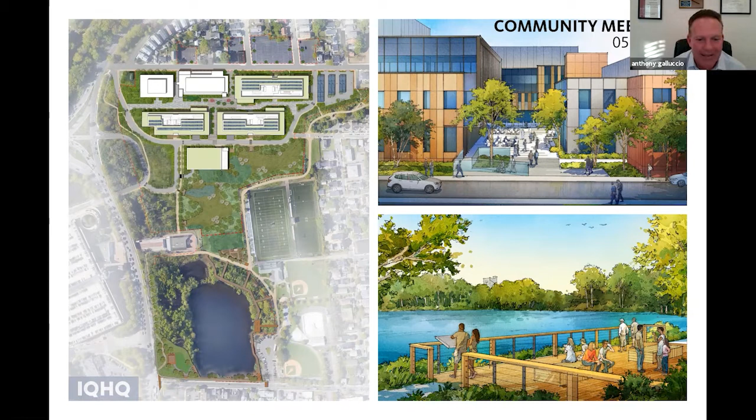Just as a note, we have to give all the credit to the neighborhood—just meeting after meeting and email, sending lists of issues. I have to thank Joel and Lisa and Ronnie and Mike and David and all the Alewife Study Group folks. I want to thank Friends of Jerry's Pond for inspiring our Jerry's Pond plan. We've been out there talking to folks one-on-one, getting opinions through interns and interacting with folks all over the neighborhood, and this is a result of all that input. I do want to thank Mayor Siddiqui and City Councilor Nolan, who are both on and both were adamant about getting more enjoyment and seating spaces around Jerry's Pond. So I want to note their pressure and their insight, and it made a big difference.

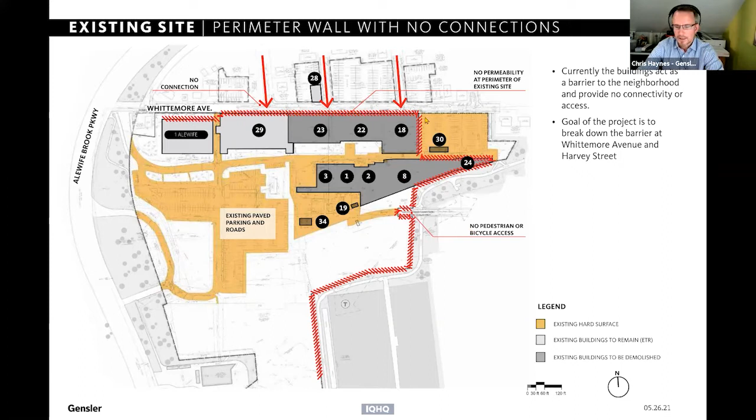I'll walk through them. We have the Whittemore Gateway, which connects to the Central Plaza and through the site down to the head house. We'll talk a little bit more about that. We've got some great imagery to share around a lot of activity and activation of the Central Plaza.

On the east side, a Whittemore linear path connection that we heard from you, Lisa, and from others representing the northern Whittemore neighborhood, that was a really important connection that was needed. So we're working on implementing and integrating that into our design so there is a clear path and connection from Whittemore to the linear path. That also connects into the east-west axis of the project we call the Promenade.

At Harvey Street, currently there's a fence and no access. There will be bike and pedestrian connection. There is no vehicular access, there will be emergency access, but no vehicular access. So no cars cutting through the site or coming on Harvey, only bike and pedestrian at that connection point. That's where we have a blue bike station that we've proposed, which we heard through the community groups was an important amenity to include on the site adjacent to the linear path.

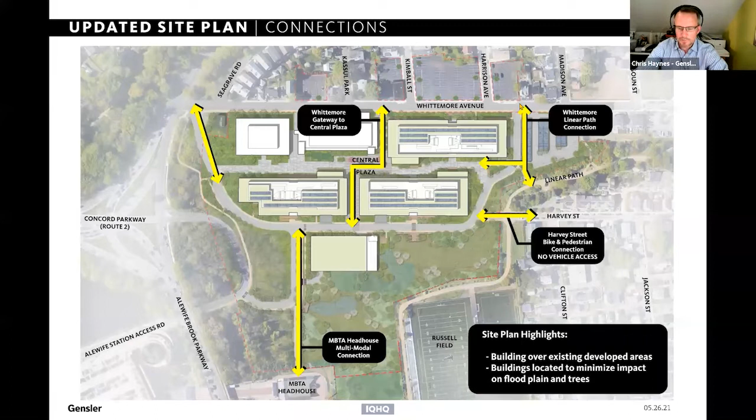So those gateways really turn into this network of paths, and I think we worked on these paths week in and week out together with the Alewife Study Group and others to really land on what you see today. So it has been quite an iterative process, and that's been great.

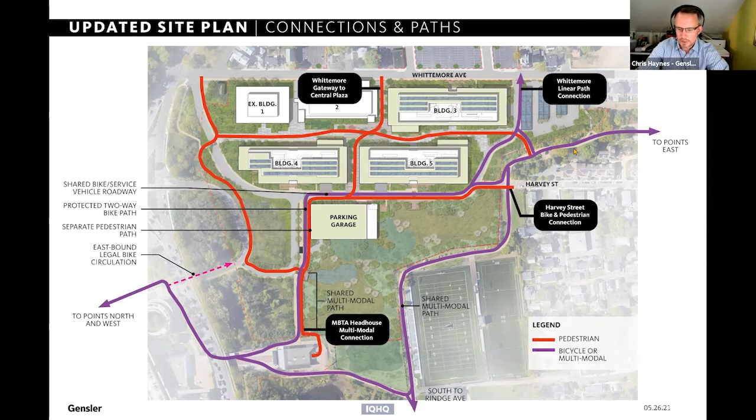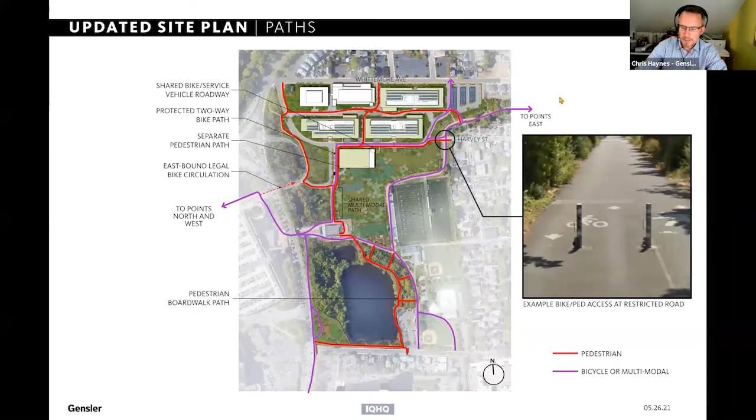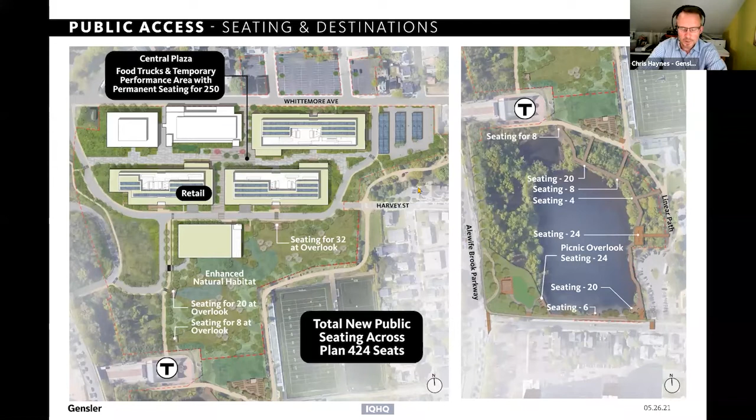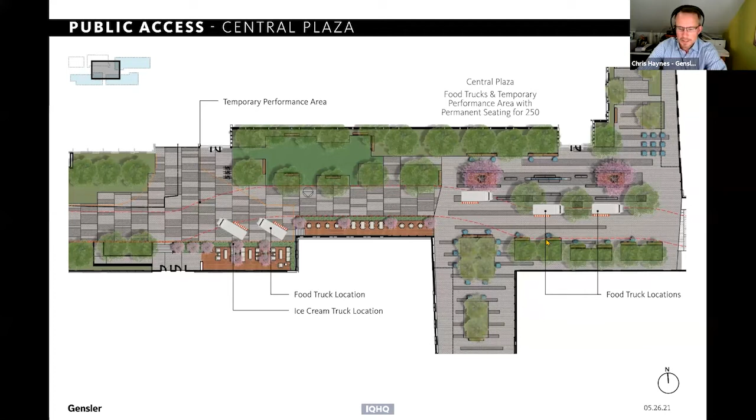There'll be more detail about a lot of the Jerry's Pond areas, but I do want to show some specific imagery around the center plaza and zoom in a little bit on that area, because it does offer a variety of seating. There's a fountain in the center that in the summer and non-winter months will be a great attraction. We're showing food trucks here, an ice cream truck, really a vibrant activity within the Central Plaza, with seating for over 250 throughout various seating arrangements, movable and fixed. And then I'll go through a few views.

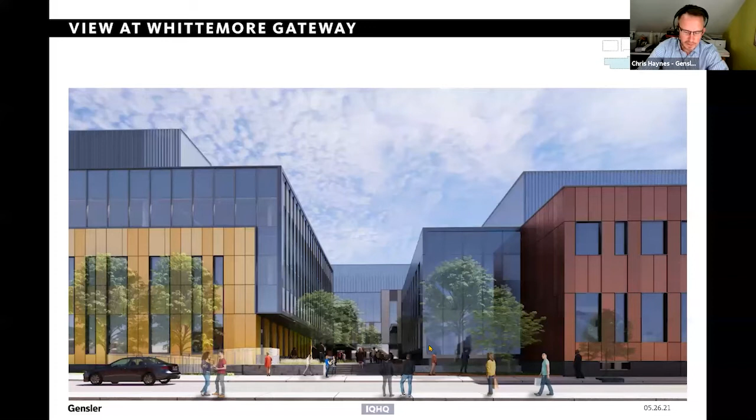As we go into the Central Plaza now, you're seeing the food truck activity within this Center Plaza, variety of seating, both fixed and movable, to create a really nice dynamic atmosphere. We also heard, more trees within the Center Plaza, so we added probably another half a dozen or more trees within the Center Plaza, more shade, less heat island impact. So a lot of great improvements there.

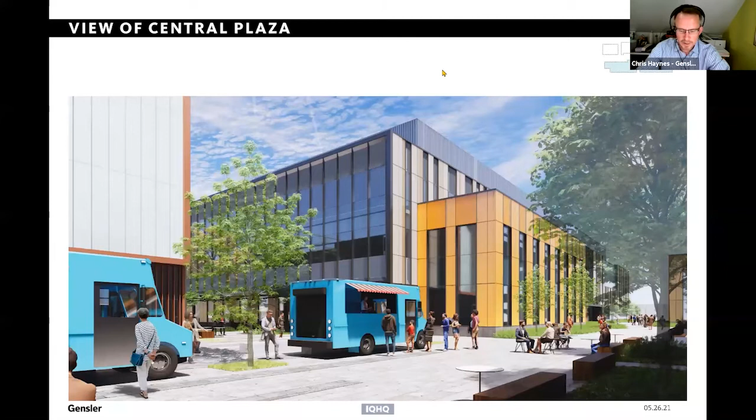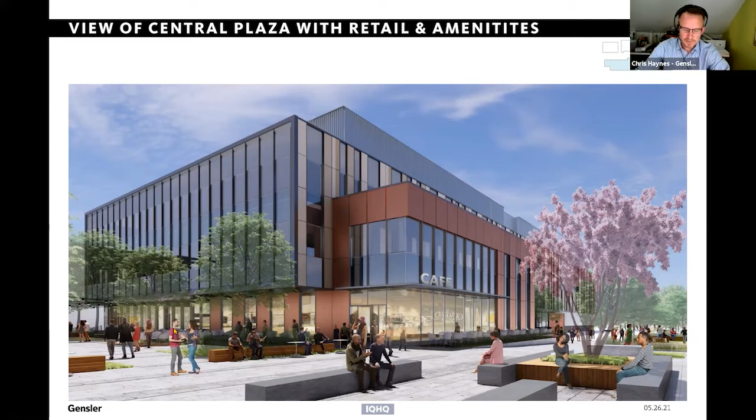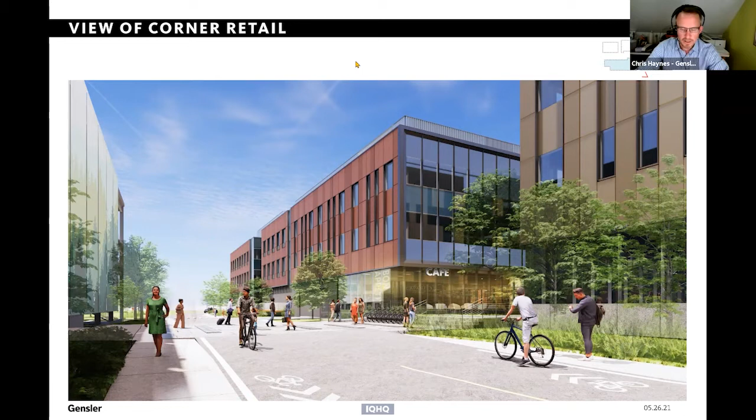Turning around, looking back toward the retail area, you can see nice visibility into the retail and amenity space. We're showing lights strung between the buildings, so a nice festive atmosphere within the Center Plaza area. Now we're down working our way along what we call the service road, where we have the bike shared path that you can see in both directions, as well as visibility to that retail spot. So if you're walking from Harvey Street on the way to the T, you could stop by, grab a coffee or a breakfast, and head down to the T in the morning. A lot of great opportunities and exciting destinations, and it's great to be able to share a lot of these images that we have developed over the spring through great collaboration with this group.

And then I'll end my section here just talking about the MBTA head house. We know it's in tough shape. The plaza is in tough shape. The paving, IQHQ is in talks and in coordination with the MBTA to make a series of improvements to the head house.

We're widening the path to the north, and they're looking at a mural program for the north facade. There's quite a mural history in Cambridge, with some really great murals in Central Square and other areas, so that could be a really exciting opportunity for engaging local artists. We'll also be painting the rest of the head house, freshening it up, replacing the entry doors, replacing the paving, and adding new plantings. You can see here some planters with trees to add shade and seating, making it a more livable plaza, a place to wait for a friend before heading out on the Red Line. We'll also add additional exterior lighting for a more secure area in the evenings.

So that's exciting. It's a big destination and a big part of the transit-oriented development, and I think the improvements will be great for the community and for the project.

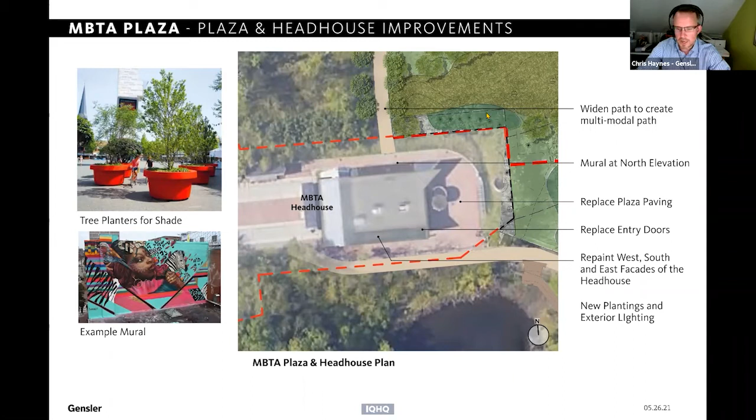Next, I'll hand it over to Chrissy Gabriel from IQHQ to introduce traffic.

Thank you, Chris. Chrissy Gabriel, Director of Development with IQHQ. I wanted to quickly touch base on parking for the site. We are confident with the amount of parking proposed for this project. Throughout the community process, we've learned that people in the neighborhood really want to make sure we have enough parking to support the site, having enough supply but also not too much in order to limit traffic impact on the neighborhood. Our proposal includes a slight reduction in parking across the site from existing conditions, and we really believe we've found the correct balance here.

The use of the lots north of Whittemore will also help contribute to that balance. We also wanted to note that we'll be allowing the community to use these lots as a resource in certain conditions, like snow emergencies and whatnot, when IQHQ is not using the lots.

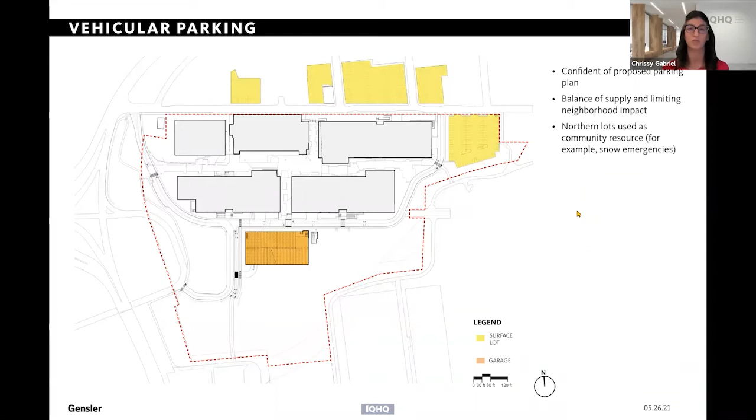I'll hand it over to Sean Manning to provide some updates on other neighborhood feedback we got regarding parking and traffic. Thank you very much.

Good evening, everyone. We're really happy that you're able to attend today. I've got some traffic updates that I want to share with you, many of which are in direct response to community input we've received over the past few months, echoing what Anthony said at the beginning of the presentation.

I want to start with the garage and its positioning relative to some really key access and circulation advantages we're trying to take in connection with the site, most notably the strong connections the site has to and from Route 2 using the Alewife Station access road. I've got some follow-on graphics to show that a lot of the traffic wants to come from and go to that route. By virtue of that connection, we can move traffic to Route 2 without ever going on local streets or the Alewife Brook Parkway, and that's certainly a differentiator of this site compared to anything else in Alewife.

For those that do want to go on the Alewife Brook Parkway, we're designing this to really minimize access and circulation through the neighborhood, making use of our westerly driveway connection to Whittemore. In the afternoon that's supported by a police detail, which also doubles as a way to better enforce the turn restriction on Whittemore, where you're not allowed to go eastbound through the neighborhood between 3 and 7, Monday to Saturday.

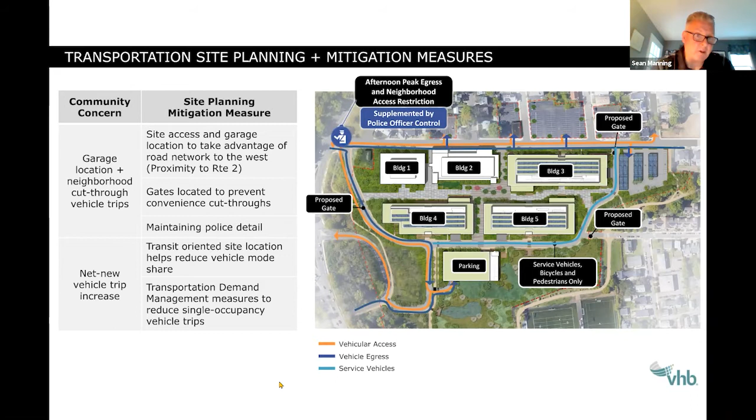I want to speak to the notion of Route 2, which journey to work data for the Alewife district suggests up to 50% of our traffic is going to come in that direction. Certainly, we have traffic that we need to manage on Alewife Brook Parkway. We know that, and we are identifying a modest amount of downtown traffic that may come up Massachusetts Avenue and could use Magoun Street to get in. Although we are talking with ASG about how we can better encourage those folks to go to Mass Ave and take a left on Alewife Brook Parkway.

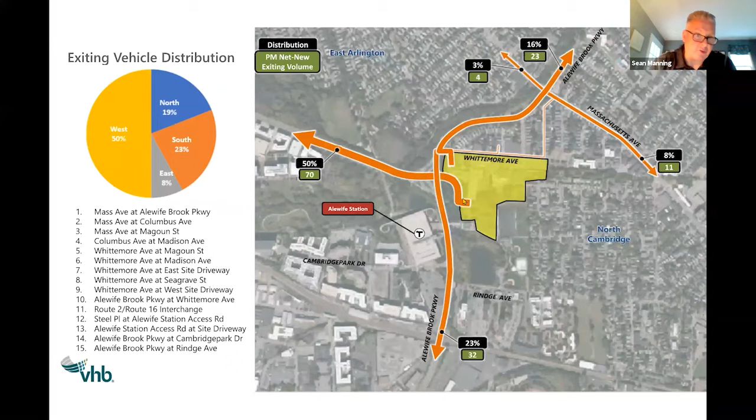If we can click again to the next slide. This is exiting traffic. It's essentially showing the same thing, but again, our goal is to really leverage the value of direct connection to Route 2 and minimize traffic on other streets.

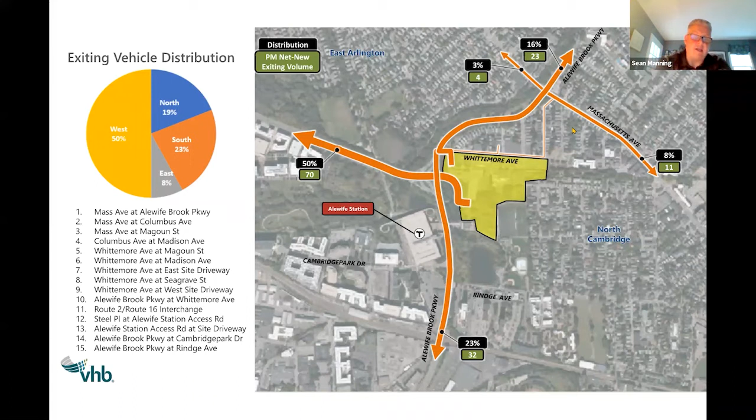So that's all I have for now. Thank you very much. I'm assuming you'll have questions and comments, and we're happy to engage you in that. And I'm turning the presentation over to Eric Ruoff, who is going to walk through some project sustainability updates for you. Thank you. Thanks, Sean.

Hi folks, my name is Eric Ruoff. I'm with the Green Engineer, and we're the Sustainable Design Consultants for the project. This team really identified sustainability as a foundational goal for the project right from the get-go, and we certainly heard similar priorities from the community. So we're excited to have this opportunity to provide an update on some of the initiatives underway, and hope you'll be pleased to see what we're presenting here, because there's a lot of exciting stuff to highlight.

So let's dive in. We've got a slide of general elements to touch on. This site includes a significant amount of open space, as Chris already mentioned, and we'll get into more detail as we go on. Much of this is going to be sensitively restored to more natural conditions. So that's great. And there was a mention of more trees - we got more trees along Whittemore Ave as well. The site lighting along any perimeter spaces will be sensitively and respectfully designed for light pollution impacts.

We're also primarily focused on rainwater and management of storm events, and that's going to include the harvesting of rainwater that'll be reused for site irrigation. We'll touch upon some other ways of reducing peak runoff later on. The design itself will be elevated - the ground floor and the utilities - to be above the 2070 projected floodplain height, and that's going to protect building infrastructure and keep it operational during future flood events.

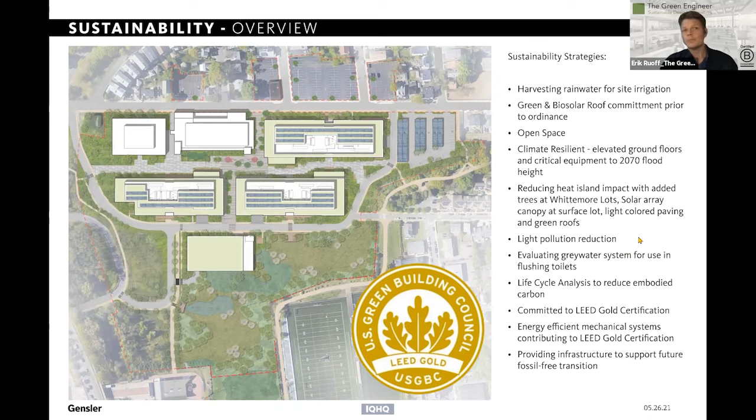So I want to dive into a few particular elements we want to highlight today. First, the project team committed to green roofs early in the design, even before the newly approved green roof ordinance took effect. Right now, the approach is to satisfy this using multiple green roof solutions. First, there will be some traditional green roofs throughout the lower roof areas of all the new buildings.

Then what we're also going to see is biosolar, which is a combination of green roofs and PV panels together. This is new to the US marketplace, an approach that really does double duty - it provides all the benefits of the green roof while producing renewable energy on site. The combination of those two has an added knock-on effect of increasing the performance of those PV panels due to lower ambient air conditions. It really shows a demonstration of this project team to be a market leader.

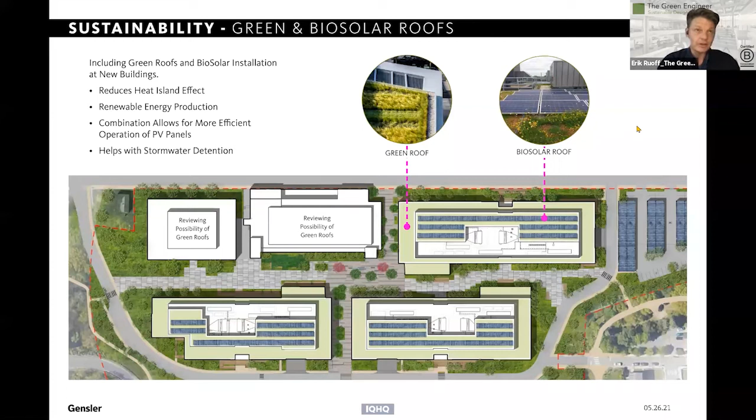So outside of just these buildings, the garage itself will include a large green roof canopy area. This is a large uninterrupted green roof that will provide, along with all the other green roof areas, significant areas of natural habitat, especially for pollinators. It will help reduce peak stormwater runoff. It will help reduce the urban heat island effect and increase the efficiency of the mechanical equipment as well by reducing that ambient air for those pieces of equipment.

So the garage is also going to include some other benefits as well. There'll be EV charging stations in there, and there's going to be a bike repair station, and we're looking at a bike donation site as well, since its connection to that bike pathway.

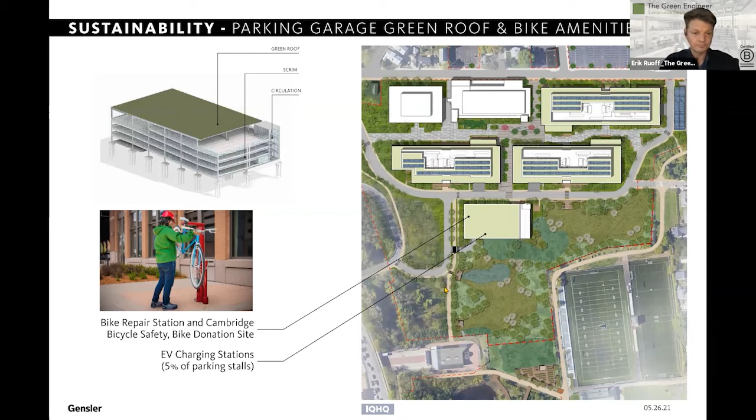So we also have some traditional solar on the site. This is looked at on the southeast Whittemore lot, and this will be through some parking solar canopies. Also in this space will be some additional EV charging stations outside of the structured garage. So we've got a lot going on from a sustainability perspective that's really exciting.

I appreciate the opportunity to highlight some of those elements right now. And we'll pass it off to Howard from VHB, who's going to go into more detail about some of the site design and flood management in particular.

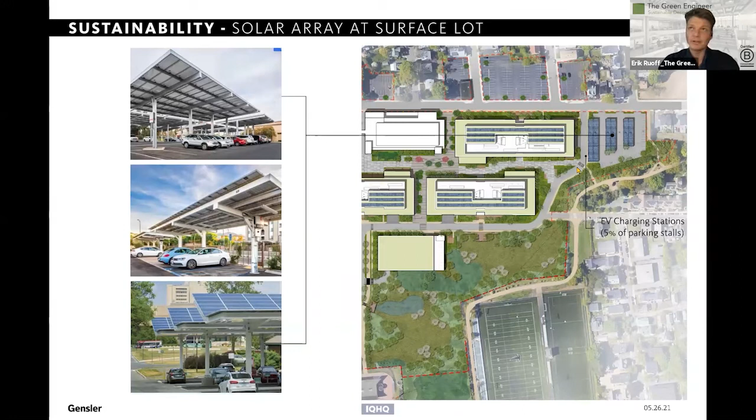Thank you, Eric, and good evening, everyone. My name's Howard Moshier, I'm with VHB, happy to be here again. You've heard a lot about the site planning aspects and many of the sustainable measures. I'm going to talk a little bit about stormwater and flood management.

So one of the questions that's been presented a number of times is how is this project going to benefit the neighborhood in terms of stormwater and floodplain impacts? The quick takeaway is this project will result in improved stormwater runoff, reduced stormwater runoff, improved stormwater quality, which is important to the health of the nearby water bodies, and improved flood storage, all benefiting the community.

There's a number of high-level measures we're seeking to implement. As you've seen on these two comparative slides, we're spending a lot of time trying to devote more space to be permeable and open. That has a number of benefits: it reduces the runoff rates and volumes, it reduces the nutrient load. As composed in the development area, we're about 50% open space.

The green roofs are certainly a big part of that. The open space doesn't even include the green roofs, but the green roofs, as Eric mentioned, reduce the runoff volumes and rates. They also reduce the nutrient loads to the nearby water bodies, and the voluntary inclusion of that large area at the garage is certainly welcomed in terms of stormwater management.

In addition to those low impact development systems, we will be using detention systems below grade that will further take the peak off the stormwater volumes in those storms. It'll hold back the rainwater, and that allows more water from the nearby neighborhoods to take advantage of the below-grade pipe capacity and nearby stormwater networks.

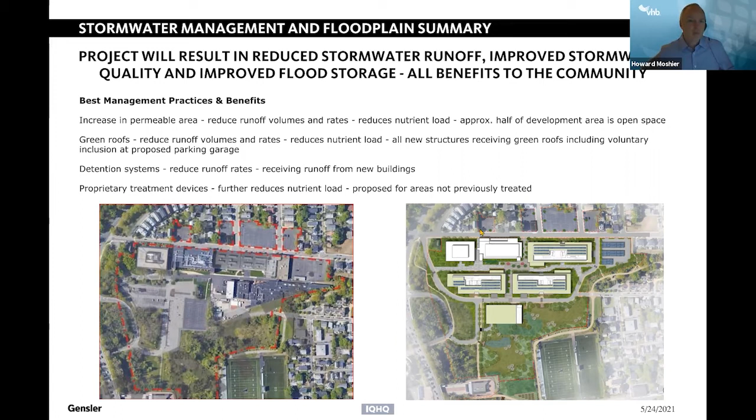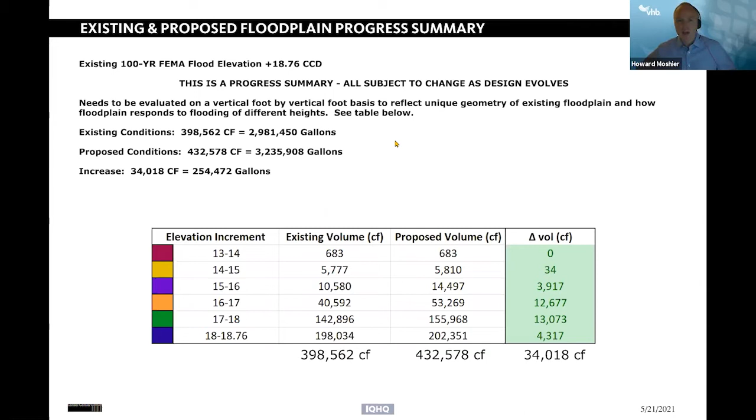So this is just a quick slide, and we're going to move through it, but not all floodplains are equal, and the project's required to analyze it on a vertical foot by vertical foot basis because floodplains have a unique response to different flooding events. On the next slide, you'll see a couple of color-coded maps that represent different elevation increments. I'll give the takeaway, but it's a very detailed analysis.

I'm going to turn it over to Chris Wagner, who will speak about habitat.

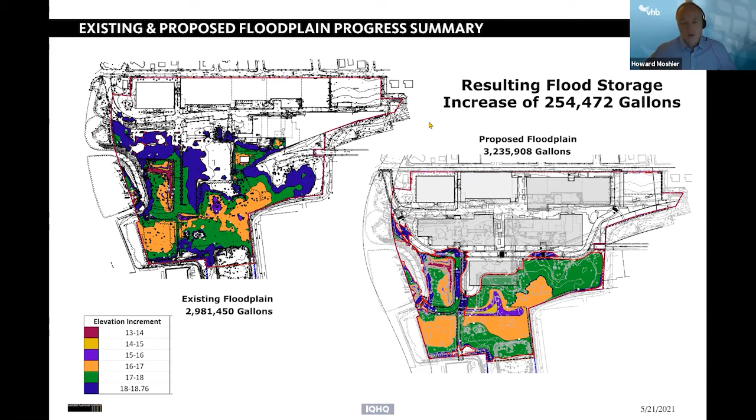Thanks, Howard. Appreciate it. Hi, everyone. I'm Chris Wagner, I'm a senior environmental scientist at VHB, and I was in charge of conducting the wildlife habitat assessment on the site, which we did in response to feedback from the community who asked that a study be done to get a better sense of the extent and nature of the habitat present on the site. So we had two main goals with this assessment.

Number one, we wanted to characterize the various areas on the site and how they're used by the wildlife there. We're not looking to catalog every single plant and animal that might occur on the site, but rather get a sense of the general areas and their usage. Number two, members of the design team were looking to use our results to inform their choices regarding site design.

So that they could make decisions that would balance development with the protection of any sensitive areas on the site. We conducted site visits in March and April of 2021. The visits in March were conducted by members of our staff of ecologists and environmental scientists. I also did a follow-up site visit in April with Matt Schweisberg, who was retained as a peer reviewer by interested members from the neighborhood.

Overall, we can characterize the site as having three main general areas: the northern, central, and southern portions of the site.

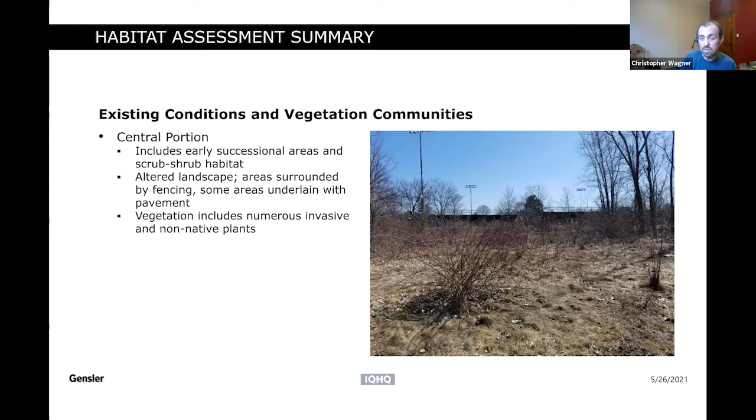Like some of the other areas on the site, there's a notable presence of invasives and non-native plants. There's also a lot of signs of previous site usage, including remnants of the old parking lot in the southwest corner of the site, the old bathhouse foundation, and other utility structures that we found on the site.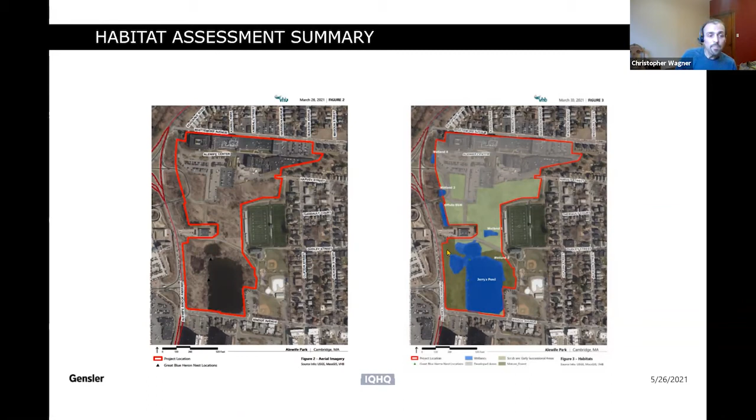So what did we find? Overall, the wildlife generally consists of typical urban residents, although there are some others as well, the most notable being the herons that use the west and northwest edges of the pond. A lot of waterfowl use the pond, and we observed a number of bird species using the pond and also the surrounding woods and fields. We also observed a number of small mammals - eastern cottontail, muskrats, chipmunks, squirrels, etc. But we also observed signs and are aware of reports from the community regarding larger mammals, such as deer, raccoon, fox, and even coyote.

As mentioned before, the site does have a significant invasive plant component, and overall the habitat on the site we would not characterize as particularly high value. However, it does provide nesting, foraging, and cover opportunities for the species that use it and call it home. It's worth noting that the fence around the pond is really what helped this community grow up in the first place - that fence has allowed that area to mature and grow into the somewhat forested canopy that's there now.

So thinking about it from a larger perspective, there are opportunities that exist to augment this habitat in meaningful ways without destroying what's there currently, and to provide better connection and wildlife corridor between the site and the Alewife Brook areas to the north and northwest of the site.

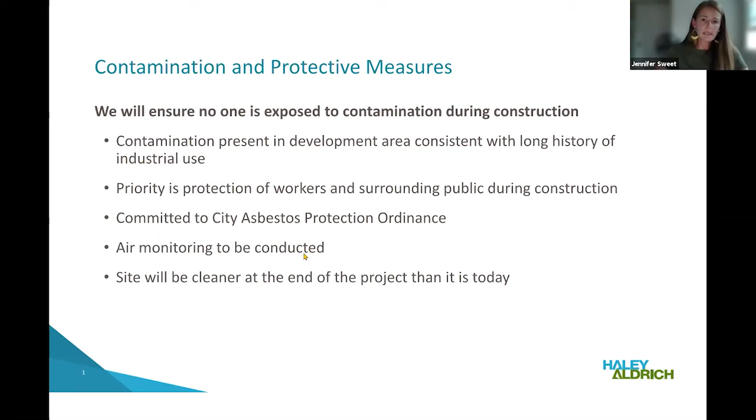Constituents were not detected in surface water, indicating no impact to the surface water. Low levels of constituents were detected in sediment, but at levels below sediment screening levels, indicating no risk to either human or ecological receptors from sediment in the pond.

Historically, there were former process waste areas located north of Jerry's Pond. Those were remediated in the late 1970s during the Red Line tunnel construction, and manufacturing operations ceased more than 40 years ago. Testing results from this April indicate that any residual contamination remaining in the sediment is negligible. The compounds detected are also commonly associated with urban stormwater runoff, and some with natural processes as well. So while there's no risk in Jerry's Pond associated with the former W.R. Grace site, we still advise against swimming or consumption of fish from Jerry's Pond, given high bacterial loads common in urbanized watersheds and based on statewide public health recommendations for consumption of freshwater fish.

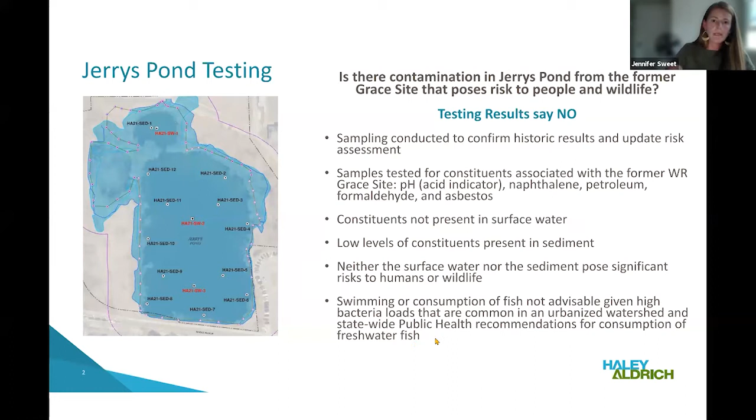So with this update, I'll introduce JP, who will talk about all the exciting enhancements around Jerry's Pond that we can feel confident are safe and aligned with the natural habitat goals. Thank you.

Thanks, Jen. I'm JP Shadley, the landscape architect on the site. Following Jen, Howard, Chris, and Eric and all their technical safety nets, I feel really lucky that I get to talk about parks and landscape improvements.

The good news from Jen's testing is that the environmental findings are so positive that it allows us to do a lot more for the environment and for public enjoyment. We're going to build a landscape that not only enhances the nature and the wildlife, but balances that environmental stewardship with a lot of new landscape amenities that'll be really attractive for people. We've continued to work with ASG, Friends of Jerry's Pond, and the overall community, and with their help, they've made a lot of great contributions. We've got some really good proposals.

So I'm going to quickly walk you through. JP, can you speak up? Be a little louder. I appreciate your calming tone, I wish I spoke more like you, but a little louder.

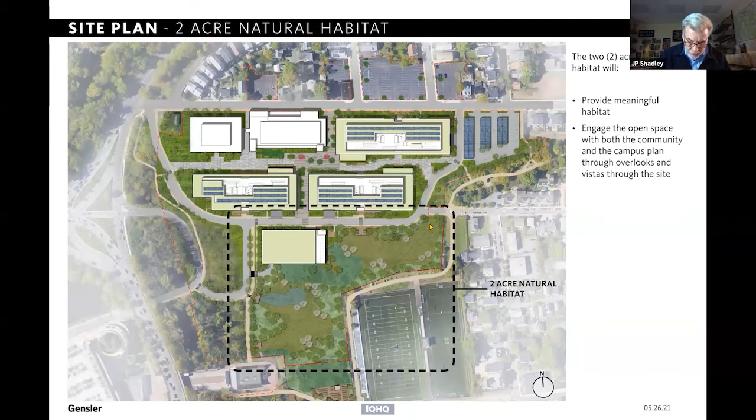Thanks, I know it's been a long day. Okay, so we're going to start with the natural habitat area, and much of the site is going to be untouched, and any areas that are disturbed will be replanted with plants that enhance the ecosystem, providing a much better environment than is there now, and it'll all be consistently managed over time to maintain the environmental health of that new landscape.

It's over 2 acres. It'll extend the regional habitat value of the IQHQ site and Jerry's Pond landscapes, particularly the avian flyways. Anthony said he'd buy me a gift certificate if I called it a bird highway, so I'm doing it. We're connecting to the Alewife Brook Reservation to the north and Danahy Park to the south. The birds are going to really appreciate what we're doing here.

Per the community suggestion, for this particular area we have a guiding principle of treating open space as a site use. Providing for nature is the primary goal of what we're doing in this large area of the site. So all the new plants will be natives, and we're going to greatly enhance the overall ecosystem from what it is today.

There are 4 basic types of landscapes I want to walk you through. The first is the well-labeled bluish green - the new bioswale. We need to do major earthwork for flood control, and we're working with the existing topography and overland hydrology to minimize our impacts. The new bioswale you see will be occasionally wet, but not always, and it's fabulous, primarily open field habitat for birds and small animals.

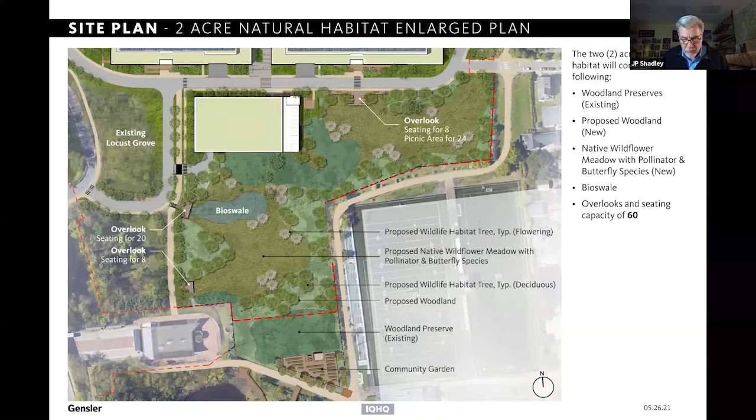The last thing I want to point out on this slide is the communal garden on the lower right, which is right off the linear path and to the east of the tea house, the head house. Can we go to that community garden blow up? Thanks, Chris.

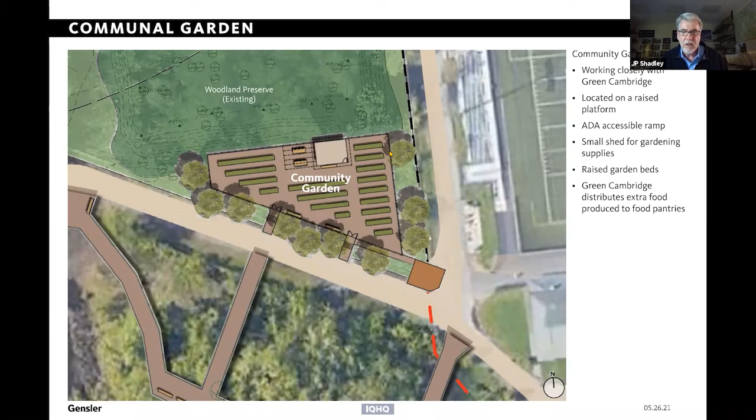We've started working with this really cool group I had never heard of on this communal garden. It's called Green Cambridge, and we formalized a relationship with them to run the communal gardens. You should check out their website, it really is a cool group. They do a lot of community gardens, only work in Cambridge, and work with elementary schools doing nature art programs. We also like them because they've worked out all the old bugs on the way community gardening used to be - like when I started out, someone would get a plot and then abandon it 5 years later, so things looked real scruffy.

But now there's a farm coordinator role. So somebody manages it and all the garden beds are shared, and someone is on site every day, at least for some period of time during the growing season.

In terms of construction, we are working in the floodplain, so the whole thing is on a very slightly raised platform so water can be stored underneath it. It's all made of the same high quality decking and railings we're using through the whole project. There's a small shed for gardening supplies, bicycle parking, multiple sets of stairs and a ramp. Joel, you can see we've cropped that corner and I've got the brick pavement in the foreground to open up that turn so it's a little safer on the linear path.

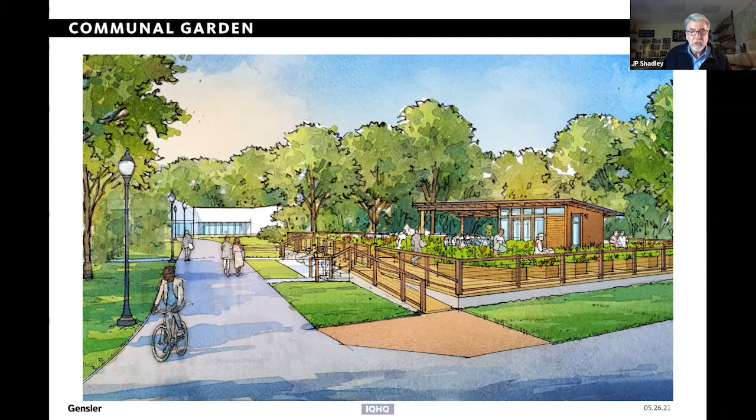Let's go to Jerry's Pond. And it's still me.

So the original plan we showed you, we had some great aspirations and some good ideas, but we've learned so much by working with the community. For example, that red line you see in the foreground used to be really close to habitat area, and we've really worked hard on developing that. But let's just go to the next slide.

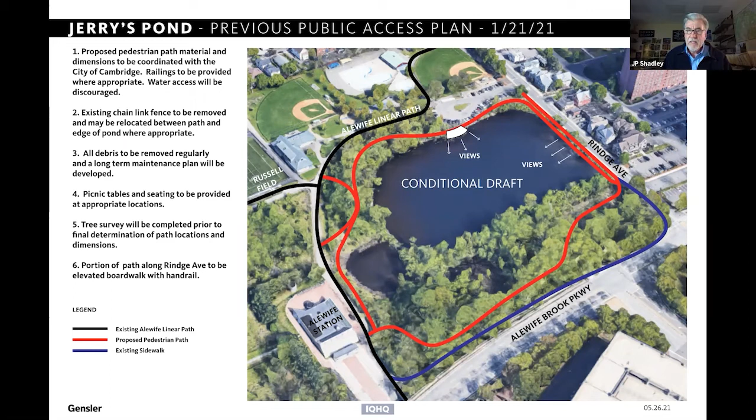So this is our new plan, and I'm going to walk you around Jerry's Pond, but I want to start with the boardwalk on the east side of the site. One thing I really want to point out here is that the community made it really clear they wanted a direct pedestrian link from the south to the north, so you could come across Rindge Ave, not have to go through the parking area, not have to fight with the bicycles when it's really busy on the linear path, and go directly up, have a nice, pleasant, wide boardwalk to walk on that heads straight up to the head house.

So we worked really hard to get that, to reduce the pedestrian and bicycle congestion on the linear path. For the alignment of that boardwalk, we tried a couple different things, a couple different walks. While we've got good connectivity to the linear path so it's very safe, we also thought about running that path up the middle of it, doubling up the path. But by having a singular path on the perimeter close to the pond, we've optimized how people will experience it, but we've also not impacted the habitat, because there's a lot of small mammals that will live in there.

And we're going to clean that area up, the invasives on the ground plane - I'll show you a picture of that in a minute. But there's a lot of overlooks with lots of seating. We've got 114 seats around the pond.

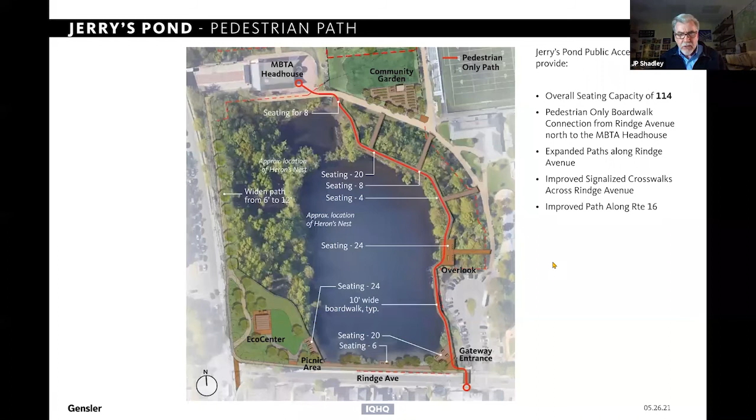Okay, I'll show you. We go straight to the gateway here, JP. I'll show you a slide later of what it feels like as you're walking through the boardwalk. But let's start on this lower right corner, down by Rindge Ave on the southeast corner. Can we go straight to it, Chris?

See the blow up? We're improving the signalized crosswalk. Right now it's signalized, and we're going to add colored street print markings for additional traffic calming. Then we're going to do a gateway entrance. Lou was really adamant about this, it was a great idea, so we folded it into this. We're going to do a really welcoming monumental gateway entry.

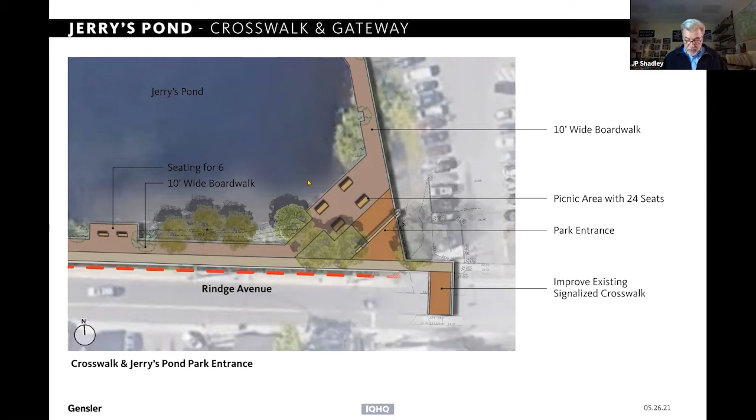Let's go over to the bathhouse overlook. Next image. The boardwalk takes you straight north up to this overlook, which is built right on top of the old historic bathhouse. We have historic markers there, one will certainly describe how there used to be a bathhouse here. That 10-foot wide boardwalk goes straight on through unimpeded, so you can move really easily. There's direct access to the linear path and the tot lot across.

We've saved a lot of trees with this layout. It looks very orthogonal, but we're going to thread the needle and save trees. There's lots of seating here, and it's kind of cool seating. Next image.

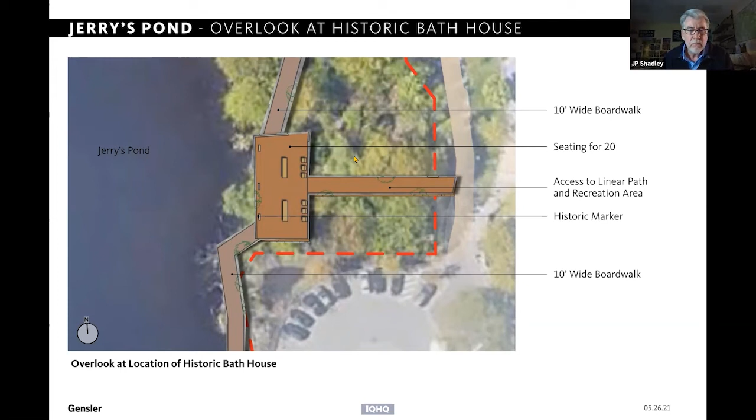This next outline shows you where the next improvement is. If we just go to this perspective, there's the blow up of it. It's a picnic area for 24 people. There's a couple of entrances to it, so you feel nice and safe when you're on it.

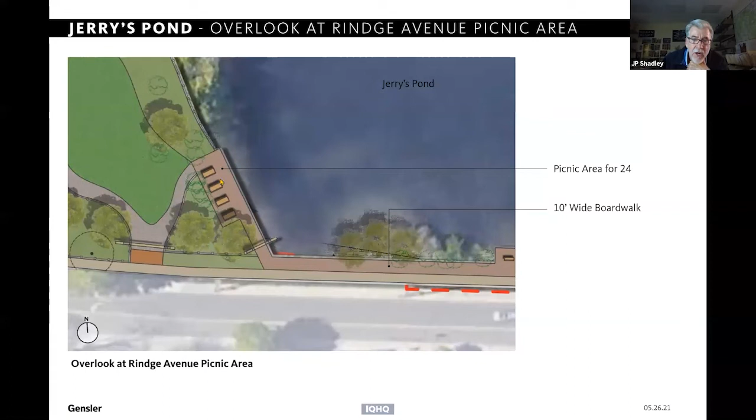Okay, this is one of the most exciting new things. It's the Eco Center, let's blow it right on up. Anthony can talk to the programming of this a bit more, but what we've got here is, now that we know the ground is safe and that we're actually working somewhat on underlaying pavement under some of these green areas, what we've done is thread the needle in terms of our improvements to the bicycle circulation along Alewife.

That sort of meandering 12-foot wide path that you see, we're going to leave the 6-foot wide sidewalk that's next to Alewife Brook Parkway. You see the circles drawn in a very architectural way. Those are actually some of the most beautiful and valuable trees on the entire Jerry's Pond area, because they're northern red oaks. They're native, they're really healthy, none of them have been whacked by trucks. They're prolific with their acorns, so they provide great habitat. And then inboard of those is a really strong growth of cottonwoods and other natives that have come in as pioneer species.

So what we've done is this alignment you see parallel to Alewife Brook enables people to come into the park for a little bit—I shouldn't call it a park, into the Jerry's Pond open space—for a little bit, to actually have a little bit of that green experience. We're also going to work on the absolute southwest side, where Chris just put his cursor, to work on that. The crossing right there is pretty tough. So for the new development across the street and for the Rindge Avenue neighbors, they're going to have a better crossing. The bicycles will have a better crossing here at the Rindge and Alewife Brook Parkway.

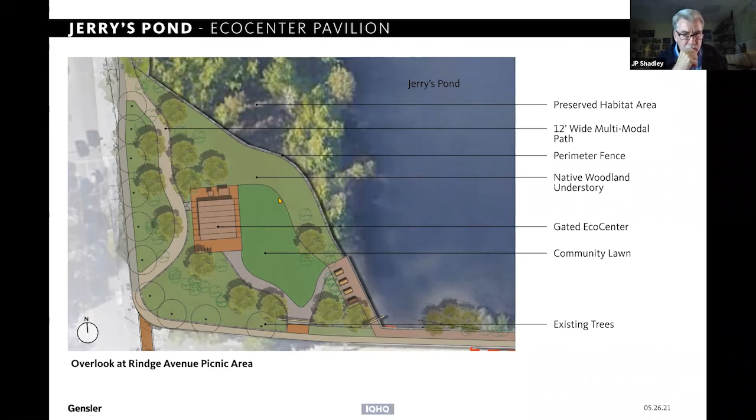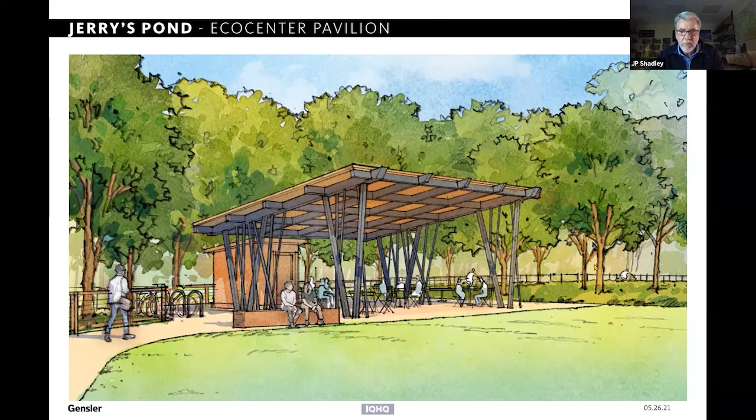You can see the bicyclists in the back, they're able to go through the park a little bit. Let's keep moving, sorry, I'm rambling.

On the north and northwest part of the site, we've also widened out the entrance to the head house, so it's a little bit safer where that gauntlet moment is right now, so people will be able to see the bicyclists coming and vice versa.

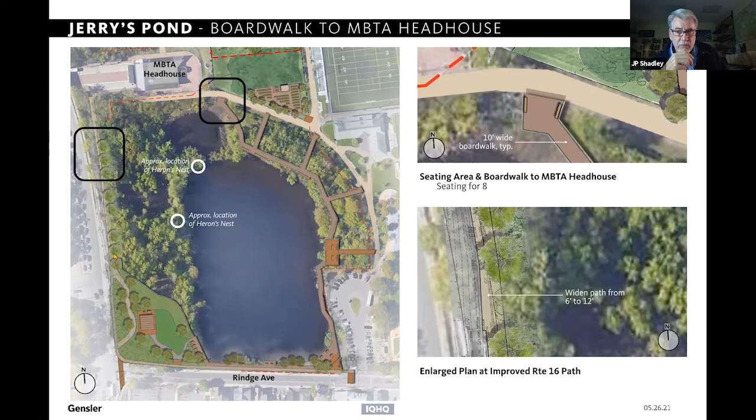And then along the northwest side, next to Route 16, we're widening that sidewalk all the way from the existing gate to where you get close to the head house, from 6 feet to 12 feet. And we're doing a careful job with the tree removal and replacements there. Next.

Oh, this is that view I was talking about before that shows the direct path to the T head house, but it also shows how we're removing the Phragmites and stuff like that from the understory in that area along the linear path. Next.

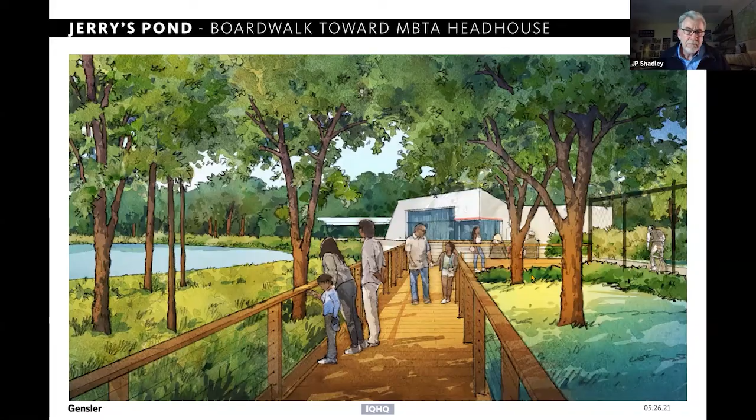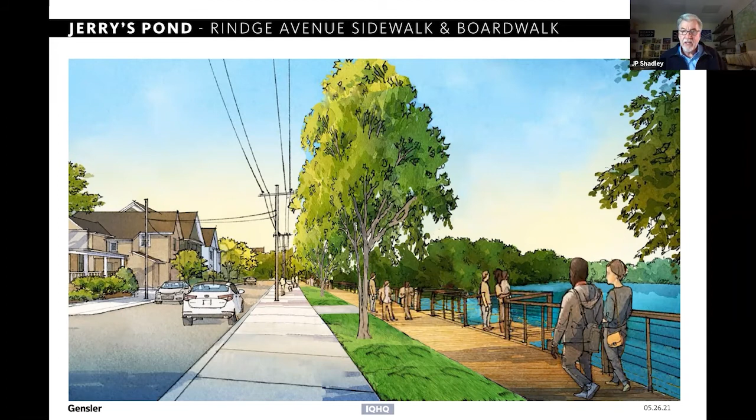So the last slide I want to leave you with is Rindge Ave. This has been a challenge. I mean, we all know Rindge Ave is spatially challenged, and it's going to remain a very, very busy street. And so what we've come to is the possibility of moving the boardwalk out over the water so we can add a green planting strip between the existing sidewalk and the new, like a 10-foot wide boardwalk. So it's a generous boardwalk.

So this idea improves the pedestrian experience by moving the people away from the road, and it allows us to plant trees that'll provide some shade and create a green buffer between the pond edge and the road. And we really prefer this idea over doing the filling option that everybody's heard about, because unlike the filling option, it won't cause us to have to cut down more trees elsewhere on the site, because we'll have to do flood storage compensation to offset any other filling that we do here.

And we just don't want to have the work that we do on Rindge Ave to take away from the other parts of the site. So we think this will provide a much better experience at the edge of Jerry's Pond than what exists today. And that's what I've got.

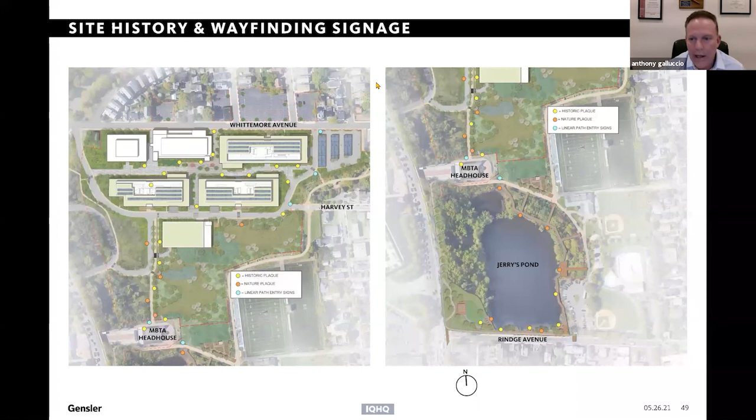I don't know who, I remember Barbo's. I think Barbo's was the predecessor of Big Burger, but, and I know there was a drive-in up there, but this is Jerry's Pond.

You can see how the Route 16 side was all disturbed, which is another reason why the Eco Center, JP has looked for areas that were disturbed in the past, were developed, so we don't have to go in and disturb terrain and habitat that has been more protected.

And the community asked Lou, and Lou had asked Lou Weitzman, who's been great with Friends of Jerry's Pond, asked for an area where folks could not be on boardwalks. And so Jen, who really advises us on habitat and usage, suggested that the area where Mr. Berger would be good because it's all been disturbed previously. And so that corner becomes an interesting option for folks to be able to get off boardwalks.

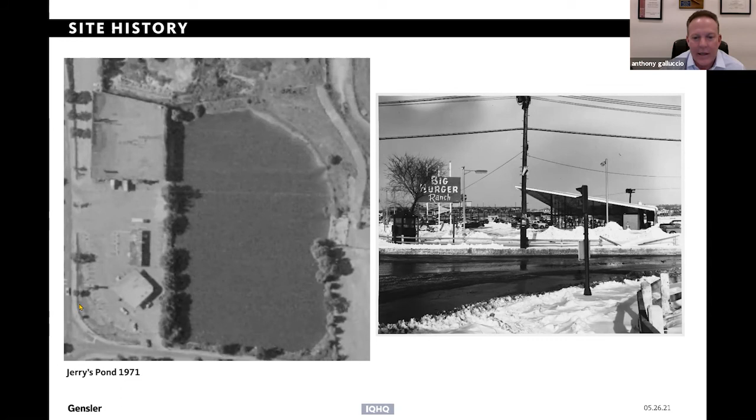But these are just an example of some of the awesome stuff. And Route 16 looks exactly the same except for Mr. Berger. Next slide.

This is just all good news. Because of the community's work, we've been introduced to a lot of organizations that have become resources for us. We've talked about Green Cambridge and Mass Audubon, and we've worked with the Ocean Institute, and David's been out there. He was out there with the Little League Saturday and youth soccer, and obviously we're deeply vested with the Rindge Ave community. We have an internship program right now with 6 local residents. We've had some fun out there. Like for me, if you don't get to know the community, you're missing out on where all the passion comes from. These are just some pictures from the last couple months.

The big news is a $1 million commitment that we are making tonight by the Just-A-Start Biomedical Career Program, which I've been a supporter of for many years, going back to being in the legislature. They've been using a lab over at Bunker Hill. So it's a Cambridge program, but there's no lab in Cambridge despite all our labs.

So they've committed to a biomedical career lab across the street. And Carl came to us, and David and Tracy and the team were just like, how do we not partner in this? He's offered to be an advisor into the development of the lab structure.